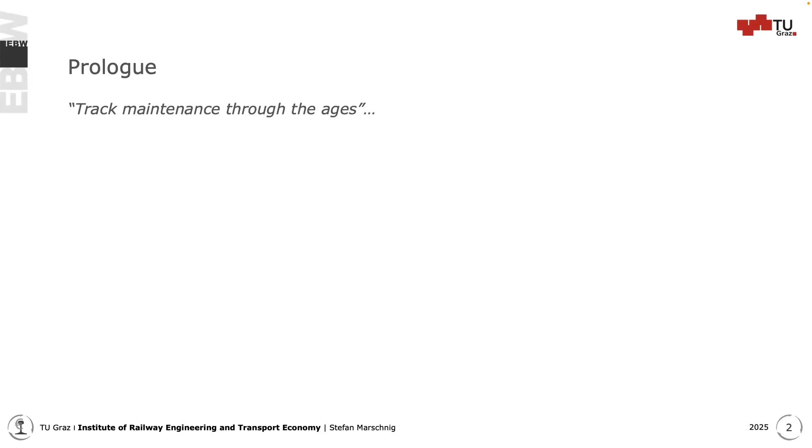It's about track maintenance through the ages, because I have been here three times, and I think we can see rather good progress on how we moved on in doing maintenance for railways. I have to specify, I will talk about track mainly. There are a lot of different assets, of course, for railway infrastructure.

I cannot move forward.

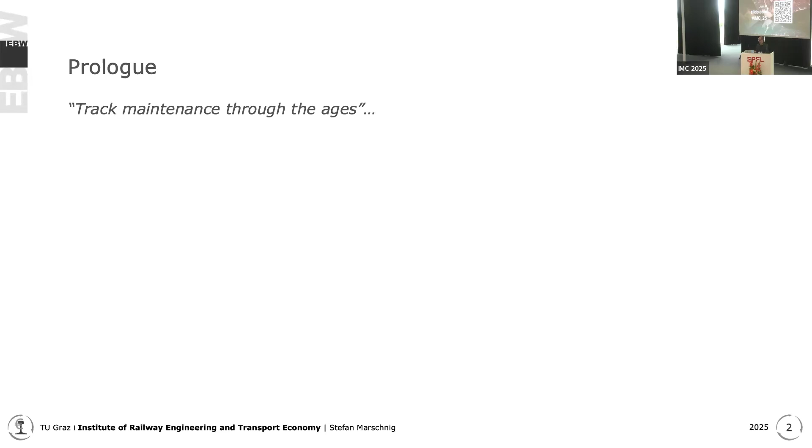In 2017, back in Winterthur, I talked about data sources, algorithms, missing data, especially for turnouts, and how we could link all this data-based planning to the actual work on track.

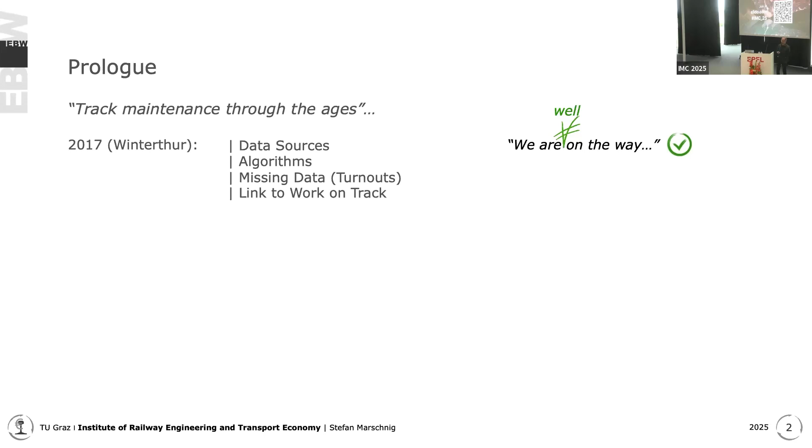And I looked it up. Those days, I said we are on the way. From today's point, I would say we are well on the way. This happened much faster than expected. How this planning idea based on data moved into reality for most of the infrastructure managers, at least that I know. So then it was four years later in Zurich.

I remember this conference, there were relatively few attendances. I talked about maintenance planning, but also on the maintenance execution, and talked about the idea that the machines on site should also know exactly what to do - on-site condition assessment.

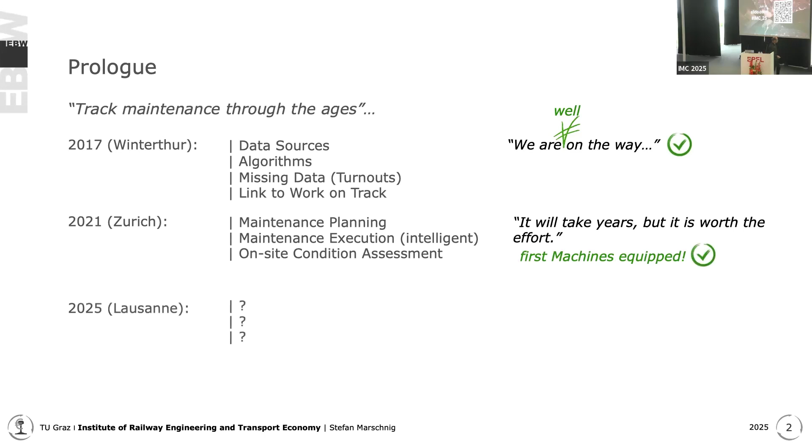This was a research project back in those days, and I said it will take years, but it's worth the effort. Today, the first machines are equipped and already operating. So again, faster - so everything is fine. What should I talk about this year to you? Again, four years later.

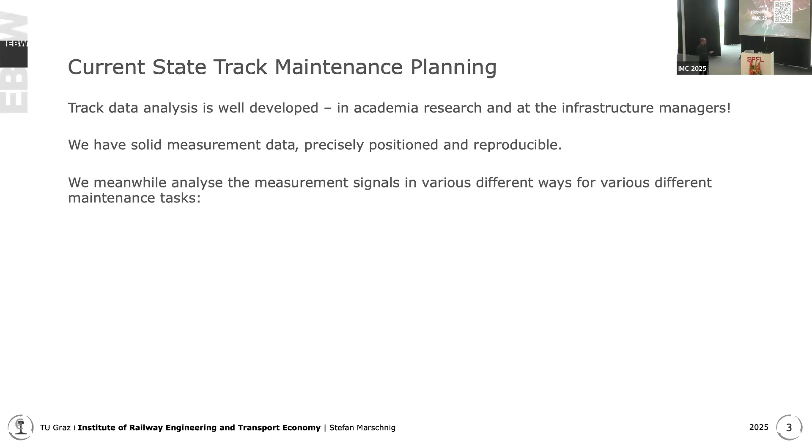First, I would like to start with the current state of maintenance planning. I think track data analysis is well developed, both in research and with the infrastructure managers. We have really solid measurement data. We achieved the biggest goals - we have them precisely positioned and reproducible. That's always a challenge, but I think this is well done. And also we analyze these measurement signals in very different ways, depending on the focus for different maintenance tasks.

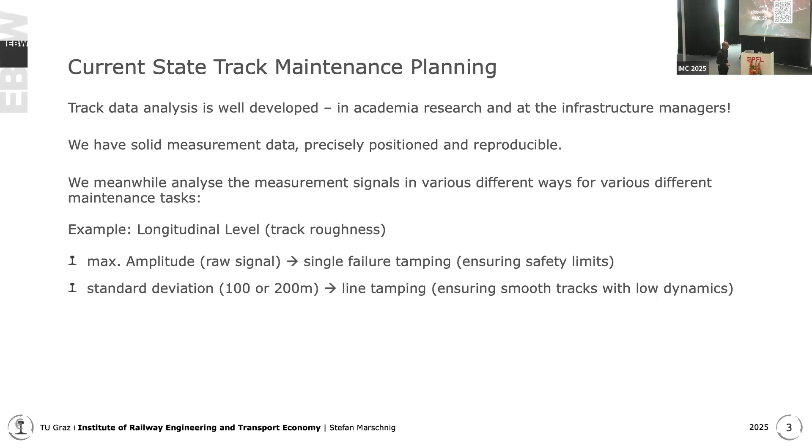When we take as an example the longitudinal level, the track roughness, we could do that using the amplitudes from the raw signal - that would be for single failure tamping, basically something about safety. We could do that as a standard deviation for line tamping, so that we ensure a smooth through-going track quality, keep dynamics low. Or we could also do that wavelength-specific with different methods, analyzing rather the ballast quality than the geometry. So we learned to adjust, to change influence lengths for those different quality indices, with the aim to locate the maintenance demands as good as possible.

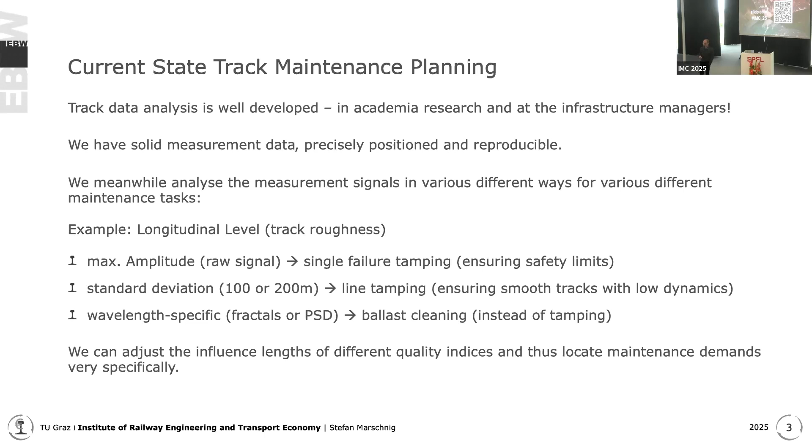What are the current challenges in track maintenance? The biggest challenge is we don't know exactly when to do the maintenance. There is most of the time a lack of track closures. We cannot maintain if trains are running, of course.

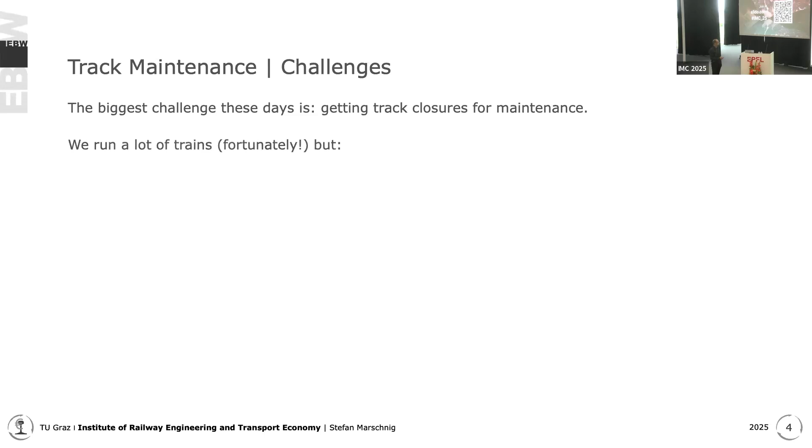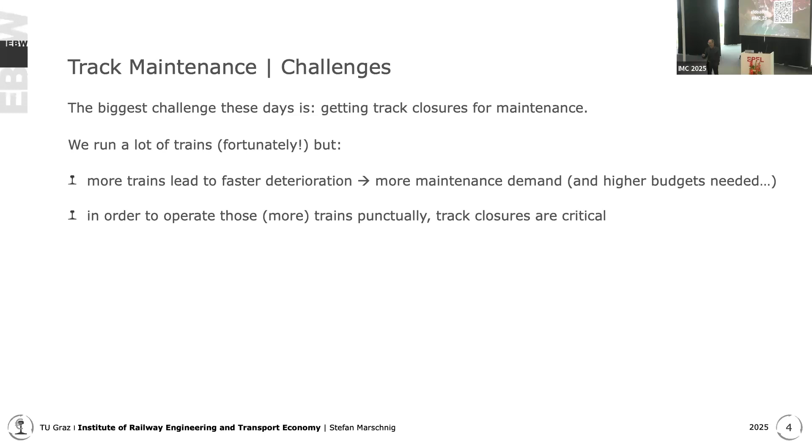Railways, you might know, are having their renaissance. So we have a lot of trains, fortunately, and we get more of them. What that means is faster deterioration - we have to do more maintenance, and of course we also need higher budgets for that, to operate the maintenance and trains, and we expect trains to be punctual. I think, especially in this country, this is nothing that should surprise you.

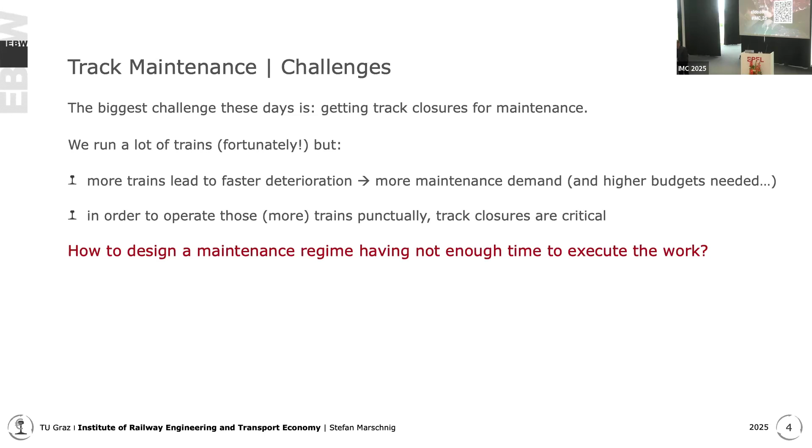The topic of track closures is critical. So the question is how to establish a maintenance regime having no or not enough time to execute it. What are the consequences? I would say, all over the place.

In railways, we started to use our tools rather than our knowledge. I told you that before - we can identify the worst sections with our analysis and keep the quality high with the least maintenance possible. So reduce maintenance and keep quality high.

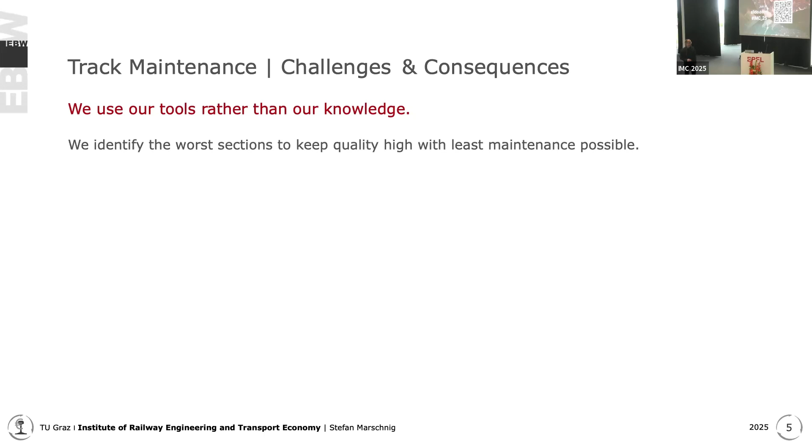For those relatively small sections to maintain, we can manage that in short track closures, and we can also operate it with quite low budgets. On the short term, this works, and there are many good examples to see in different railway networks where this is applied and works. Our analysis tools help to operate maintenance in this way.

The problem is the long term. Here we definitely run into problems when we plan or think of our maintenance in this way. As a first consequence, the unit costs of maintenance rise - so every single meter that is tamped, that is ground, whatever, gets more expensive. And especially for works where we have a lot of fixed cost, this is more crucial.

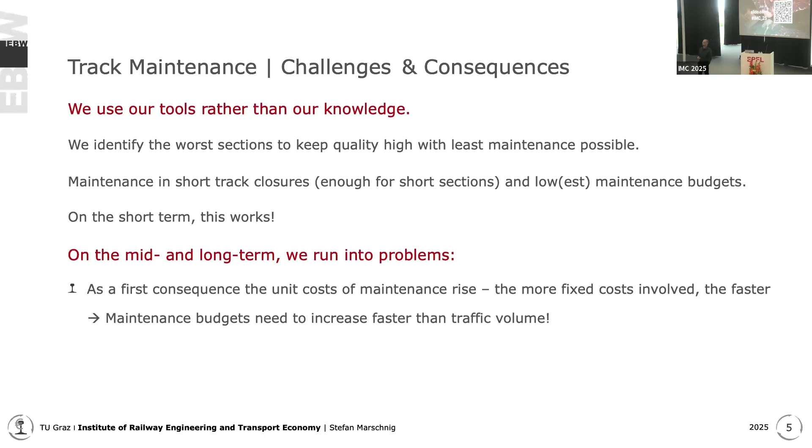That means the maintenance budgets need to increase faster than the traffic volume. And especially for track renewal, which is not maintenance, I know, but this is very expensive, and then we start to postpone it in order to save money. And the only way to postpone it is to do that by maintenance again. So again, higher budgets - you see, these are a lot of financial issues.

The technical consequences occur a little bit later, when we start to have or to lose our through-going quality when we only repair failures.

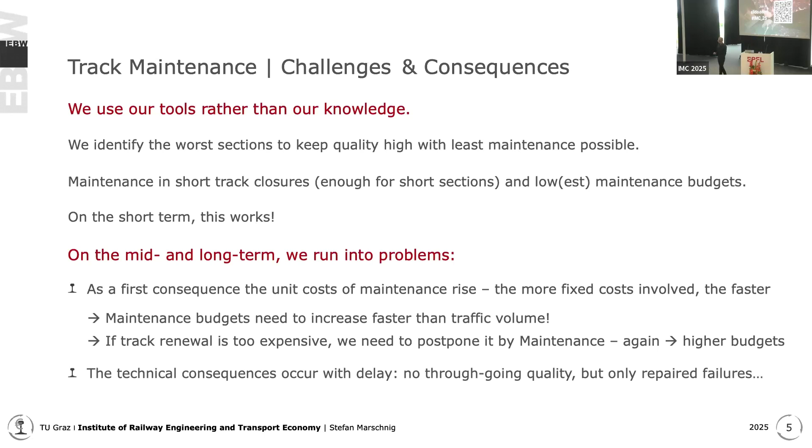So this is something general that is more linked with budgeting and financing, which is relevant but probably a bit out of scope in this conference. I would rather go to possible solutions.

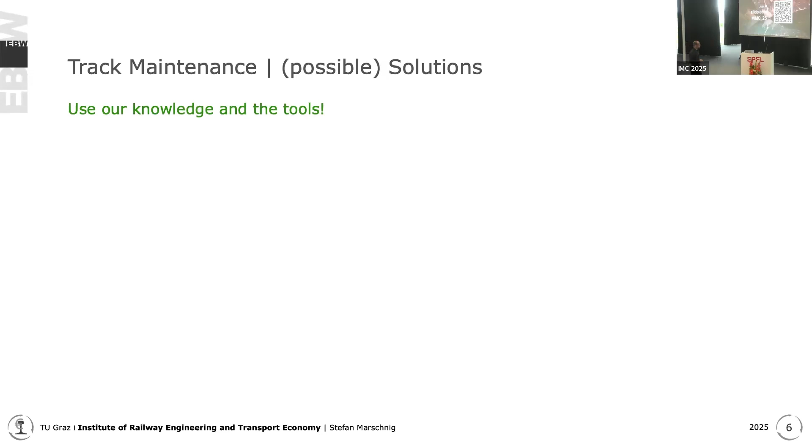How could we apply this? When I mentioned first that we use our tools rather than our knowledge, we should use the knowledge and the tools. So we could use everything that we learned in these more than 20 years analyzing the condition of different assets or different components.

To design maintenance in different scenarios built on these evaluation tools, and we can optimize it in very different ways. We could, for example, choose a scenario where we need to close down the track not that often - I would say this is rather reality today. But we could also try to optimize the intervention level, maintain a bit earlier to keep quality high. And we could also have the focus to achieve the longest service life possible.

If you would say this should be the one and only goal of maintenance, to ensure the longest service life, most of the time this is not executed. Maintenance is executed on intervention levels, not with the focus on service life.

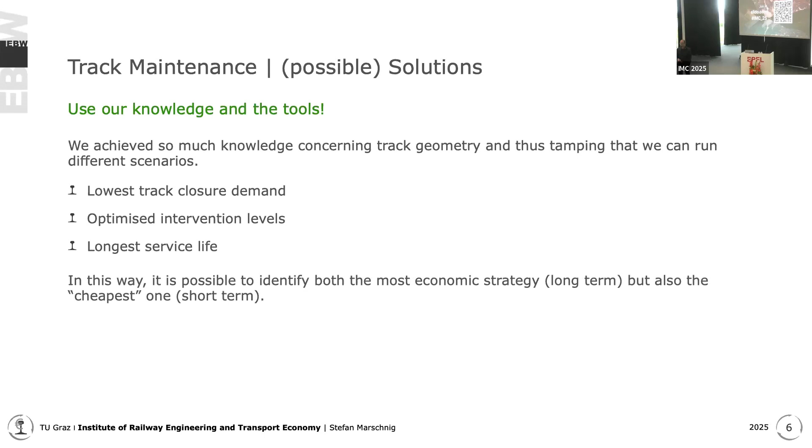I have tried to bring an example on that, where you could see also the differences between something which is long-term and something which is rather short-term. I would do that with tamping, so restoring the geometry. We would look at 3 scenarios. The base case scenario is with the short sections, that's what we apply today. And 2 other scenarios with a bit more focus on quality - scenario 1, more on service life - scenario 2.

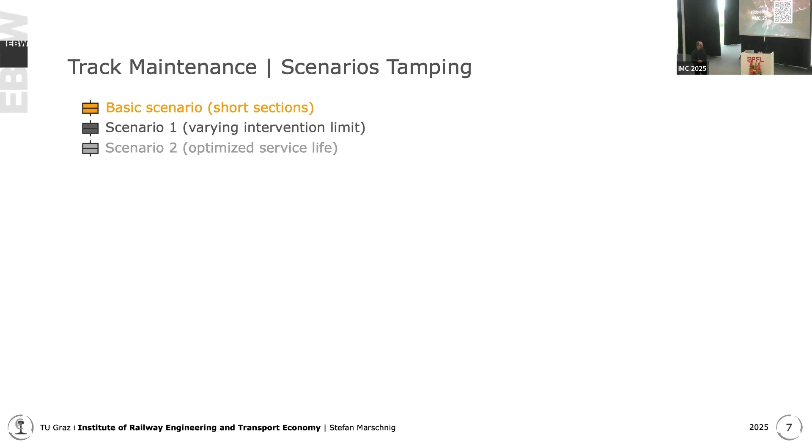So when you apply that to the measuring data that we have and change the possibilities or the sections to be maintained, and we look at the different years - this is done for the past because we have the data already and we know the outcome, at least from the basic scenario - the amount of maintenance we need per year is different in this way.

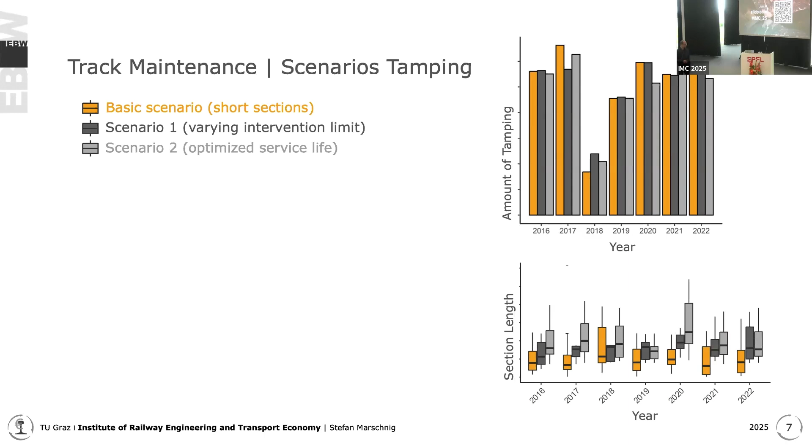That's not astonishing. It's rather that you see also the focus of this work, the section length is increased. Why is this done? In order to keep the maintenance within the budget, to keep these unit costs a bit lower. And probably the most interesting thing is how does the quality over the network develop? You see this seems to be very similar. So we do different maintenance, very different sections, and quality keeps more or less the same.

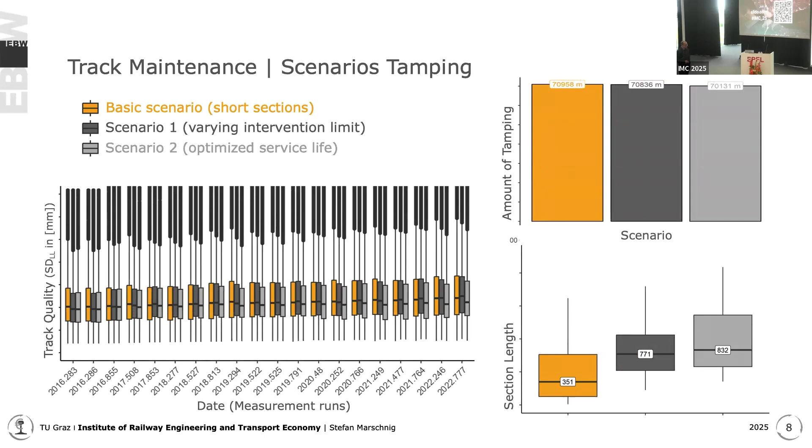I would try to summarize that for you. When we look at the amount of tamping, the amount of maintenance applied to this example, it's almost the same. So we are not increasing the maintenance, even though we are increasing the section lengths. That means we shift different sections between each other.

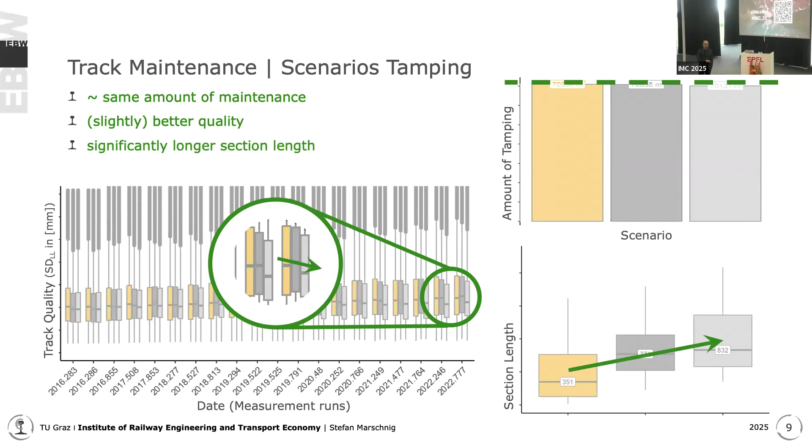The quality is slightly better, not too much, but for those who work with this data, on a network-wide or section-wise basis, this might not change too much. But here is the astonishing thing: the section length is increased very much, it's doubled. We maintain longer sections in order to keep the network working.

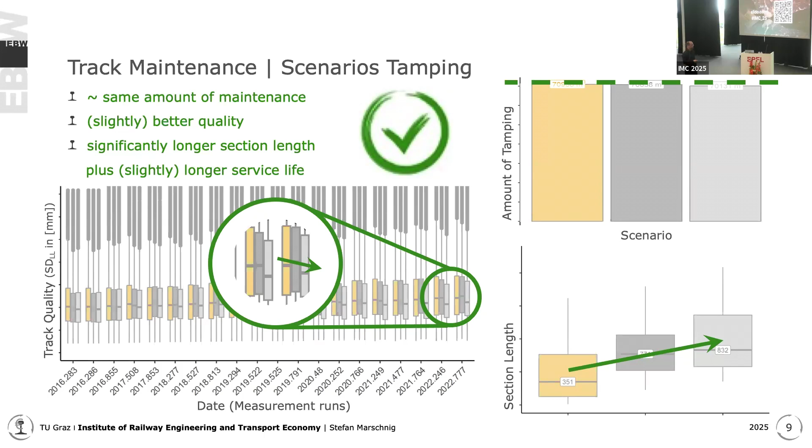There is also a slightly longer service life involved with these 2 alternative scenarios. So that could be an option to plan maintenance differently than today, because today it's not our problem to restore quality - our problem is to finance this maintenance. This might work, but for railways, that would mean maintenance centrally planned and data-based, which at least the centralized planning is not ensured everywhere.

And a second topic might help us, and this is more into research. Even though we have analyzed all those data that we have, and we see deterioration of our assets, of our components, we still act due to that what happens.

I would try to explain this in a very easy example. I would say we look at this standard deviation, which tells us the geometry or the loss of geometric quality of a track. And this looks something like this - standard deviation increases over time, quite linear.

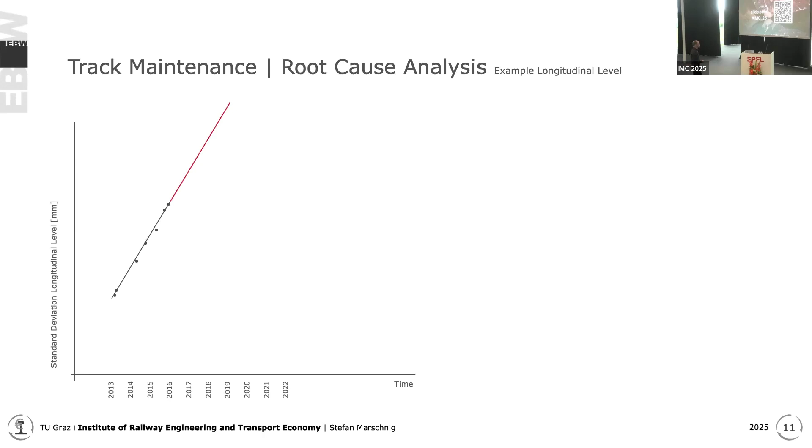This is very easy for forecasting. This is what we do in standard work. We choose any intervention level I mentioned before - we can change that - and then we go for the maintenance. In this case, tamping. And we do know quite good what happens after tamping: we restore the quality to about the same level we had before. And we can expect a deterioration rate which is about the same as before.

It's a bit more, but about the same. So this is what we are used to. This is what we take for predictive maintenance. We use our data that we have and do forecasting.

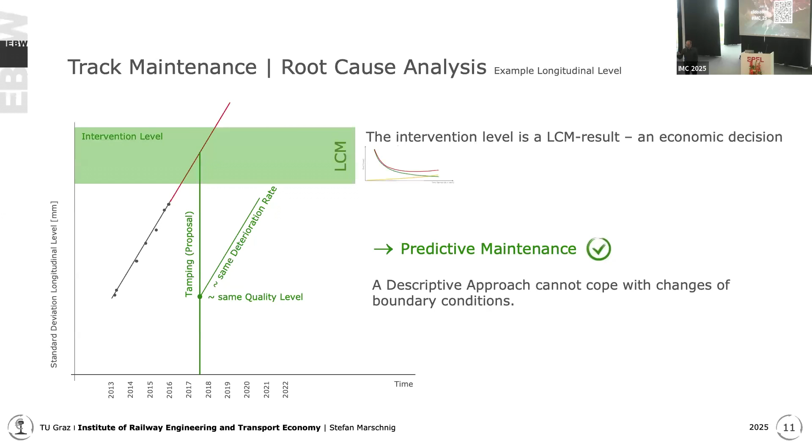The only thing that this process cannot ensure is if something changes, of course. So this is a descriptive approach. When the system or something in the system changes, it might not work. And probably the most interesting thing here is we cannot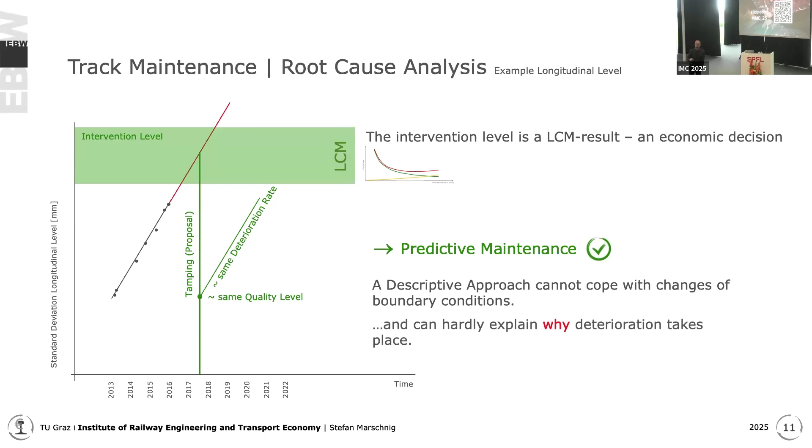explain why the deterioration happens. We can only handle it. We can describe it, we can forecast it, but we cannot explain why.

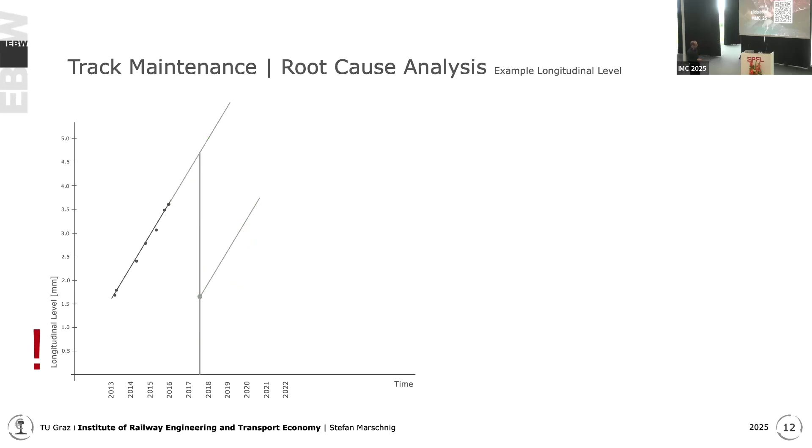Therefore, probably to look a bit more into detail, here we do not take the standard deviation, we take the raw signal. We have this decreasing quality, and at a certain point of time, this deterioration stops at the poor quality level, but there is no more change. What happens here? This is hard to describe. What is different? There is the same loading, so no external system changes, but deterioration stopped.

Then we executed tamping, and we achieved, as I mentioned before, about the same quality, but a much lower deterioration rate. So there must have been something happening in this system. It can only be a certain maintenance job.

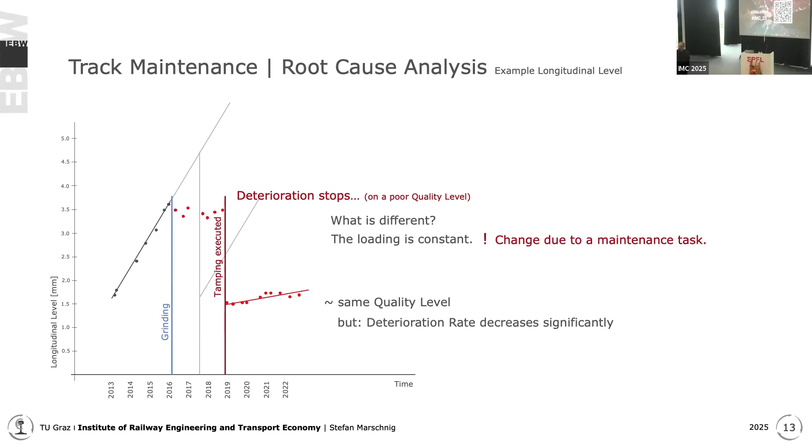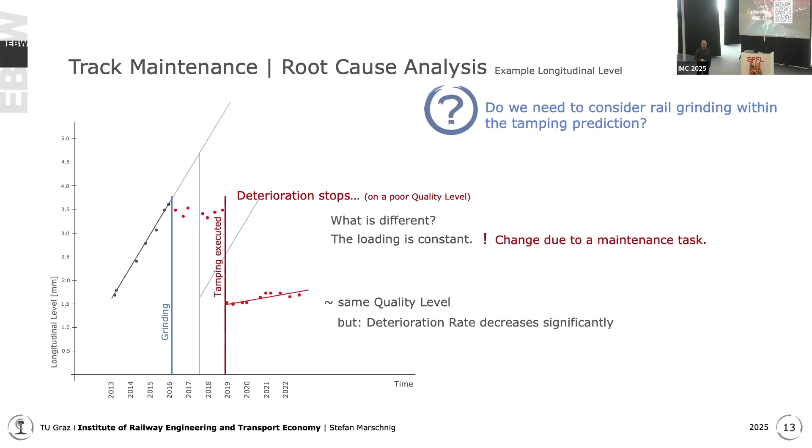Looking into the data, what maintenance job was executed, we find a rail grinding action here. So what has rail grinding, achieving a smooth top of the rail, to do with the geometry in the ballast? We were not aware that we should consider rail grinding in tamping prediction.

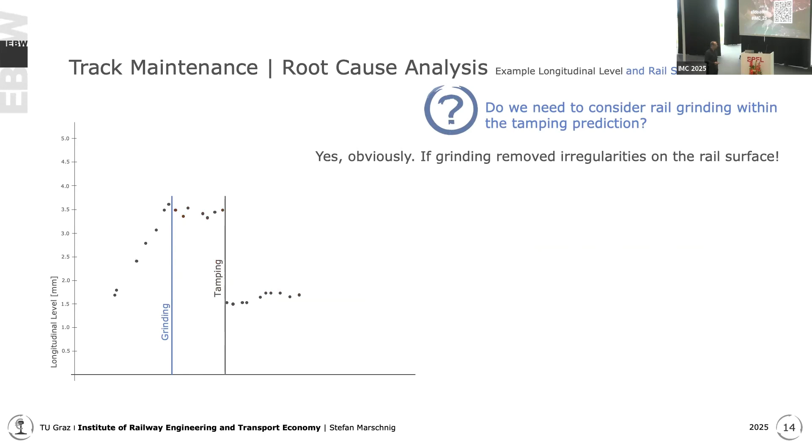If you combine data, you would see that, and we combined it with another measurement data, which is the rail surface. So we're measuring the roughness of the rail, and you see that in this case, the grinding removed the roughness and kept it stable.

So we are not talking about the component ballast here. We are talking about the forces. Generating dynamics with rough railheads has a big impact and might be the reason for the deterioration at all.

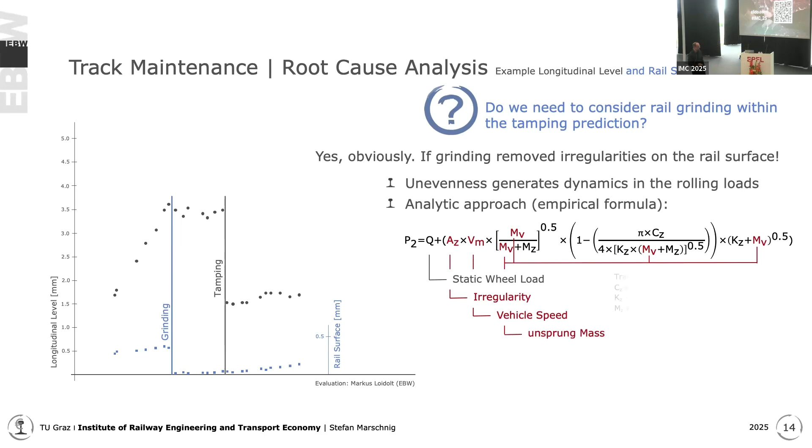So when we look in analytic approaches that we have, we would find such formulas explaining the dynamic forcings, of course. And you see here the irregularity, and this changes significantly in this example.

So we are on the way to find the root cause for the deterioration and change also the maintenance. By the way, rail grinding is much cheaper than track tamping and faster. That might help us in future.

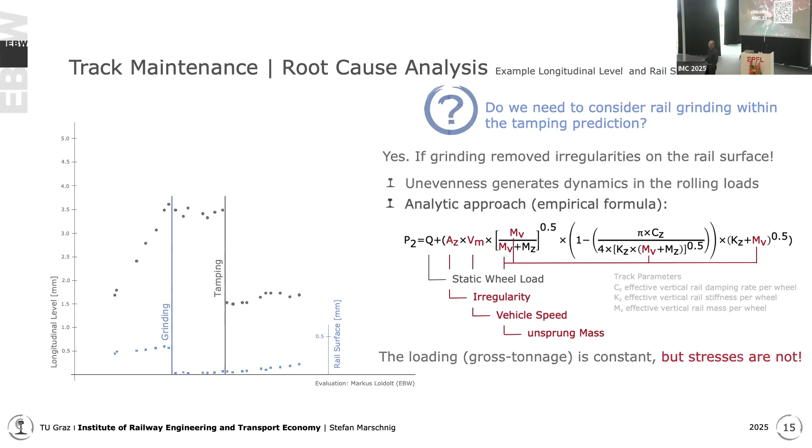So the loading is constant, but the stresses are not. And thinking on that, of course, we know that this is general engineering's knowledge that we talk about dynamics and dynamic forces, of course.

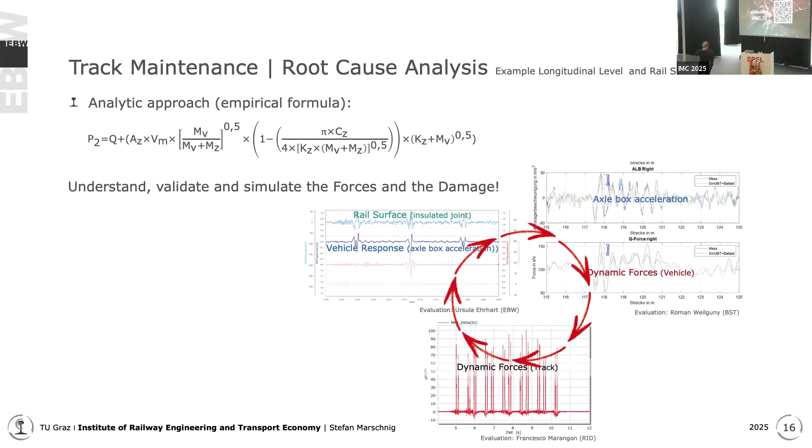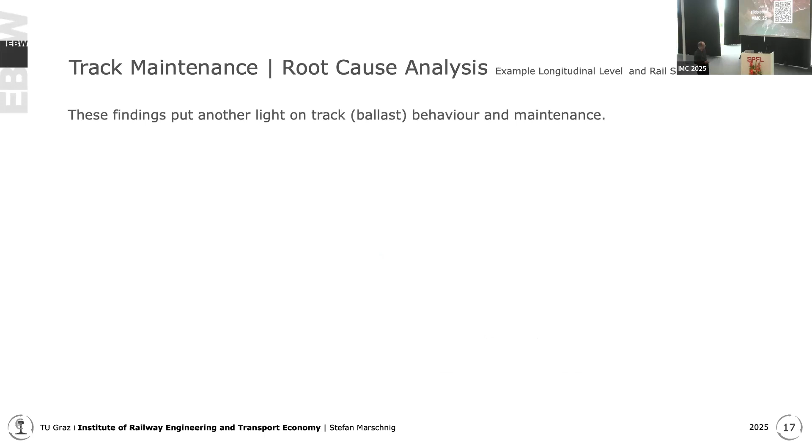But when we go this way from the rail surface to the vehicle response, the dynamics in the vehicle, to the forces of the vehicles and the measured forces in track, we see there is a certain circle that is turning, of course. And this also gives a bit different aspect on track behavior and the maintenance that is involved.

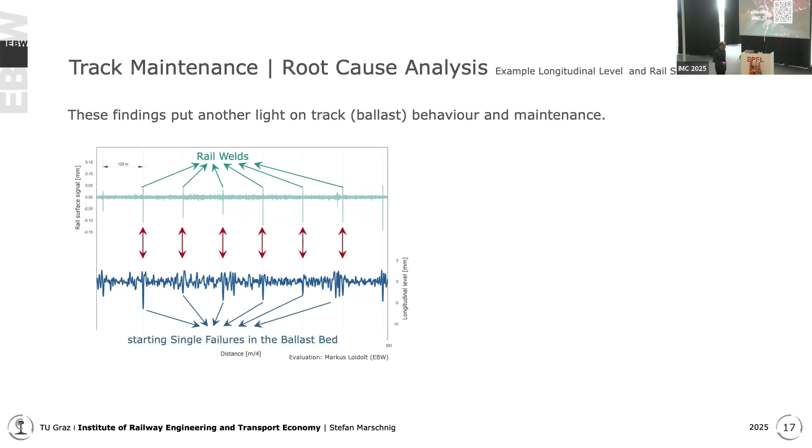Because when we look into detail, every weld of a rail is such a small unevenness in the track. And when you look at the ballast bed, you see there is a link between these failures in the railhead and the ballast deterioration. And then comes the vehicle, takes these dynamics and rolls the dynamic over the track.

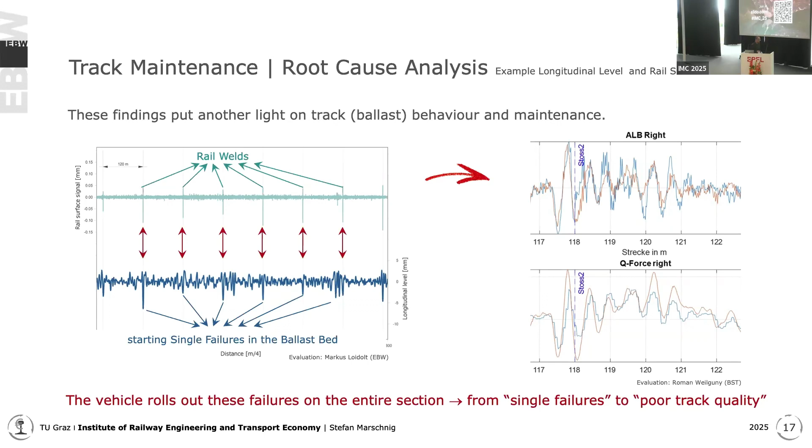So we cannot talk about single failures anymore, or we should rather talk about single failures. It's all single points, and then the track in the end has poor quality. So a combination of what we already have might lead us to those root causes and to a different, cheaper, faster, probably a better maintenance.

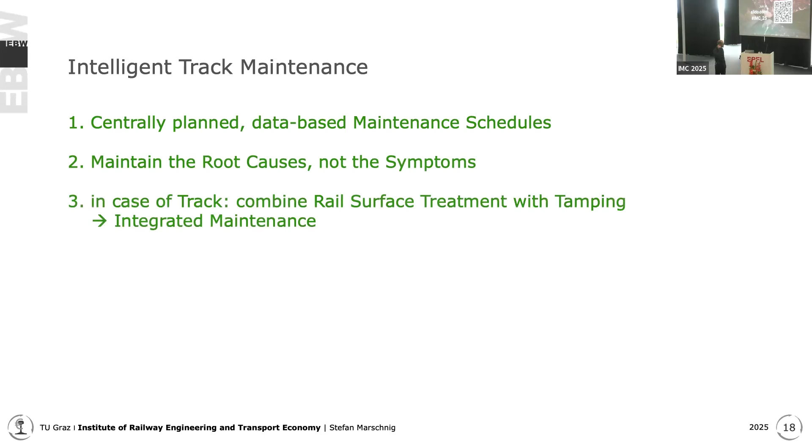So maintain the root cause, not the symptoms. Yes, in this audience, everybody would say yes, of course, but find the root causes first. That's the issue. In the case of track maintenance, that would be a different approach of maintenance, combining the tamping action with a rail grinding action.

We have this already in discussion since years. We call that integrated maintenance. But there is one issue again: this will take longer.

And having in mind that we already nowadays have too short track closures to maintain the track, this gives an additional challenge. So we need first to prove that this type of maintenance will generate much less deterioration, so will stretch the time in between the maintenance actions necessary, and therefore in the end will also save track closures and make our trains more punctual.

So, 1, 2, 3. Plan centrally. And another question occurs: do we have the machines to do that?

Our machines probably are designed for a different type of maintenance. And the first topic that I will not talk about, because we will have a second presentation where this topic is in focus, move forward with predictive maintenance for turnouts, because turnouts are crucial. They are safety relevant, they are operational necessary, and they are very expensive.

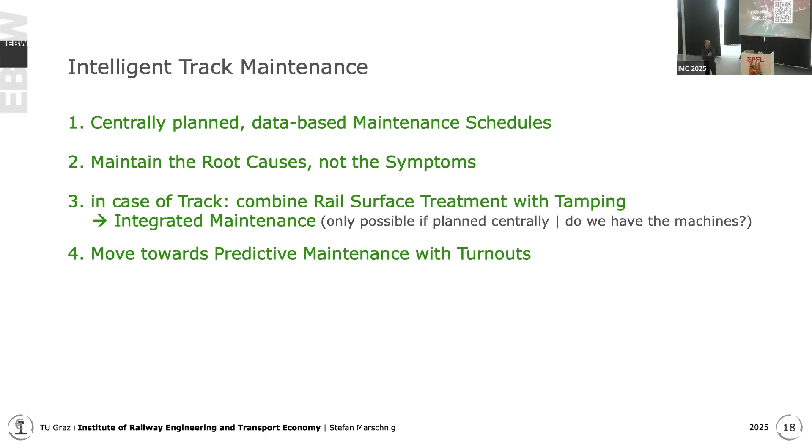There were not too many people here that joined already in 2017. That's okay, so I just mentioned it. This is what I told in 2017 as well. So we are on the way, but there was progress.

Yeah, okay. So if you question that, yes, we did something, but probably not enough in the perspective of turnouts.

So when we continuously work on the data analysis that we do, and there is so much in discussion, what do you want to do as research topic with this data? Is everything done? We can forecast, we can use the data, we already use the data.

We still see a lot of potential in finding aspects we have not seen up to now. So we will continue to do that, always with the focus to find the right maintenance.

And I'm always struggling with the conference name. But in this case, and for this year, I would interpret the right maintenance would be the intelligent one.

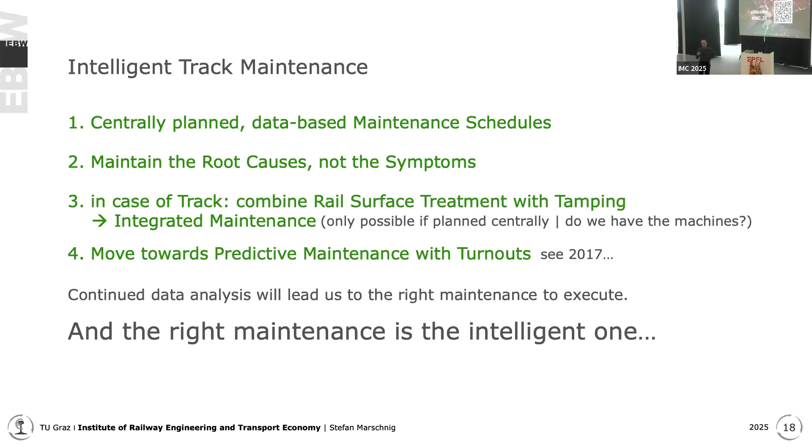I think the way to move there is one of the key issues to keep our system running, even though we have still more trains, more transport volume, and of course, probably not more money to do that.